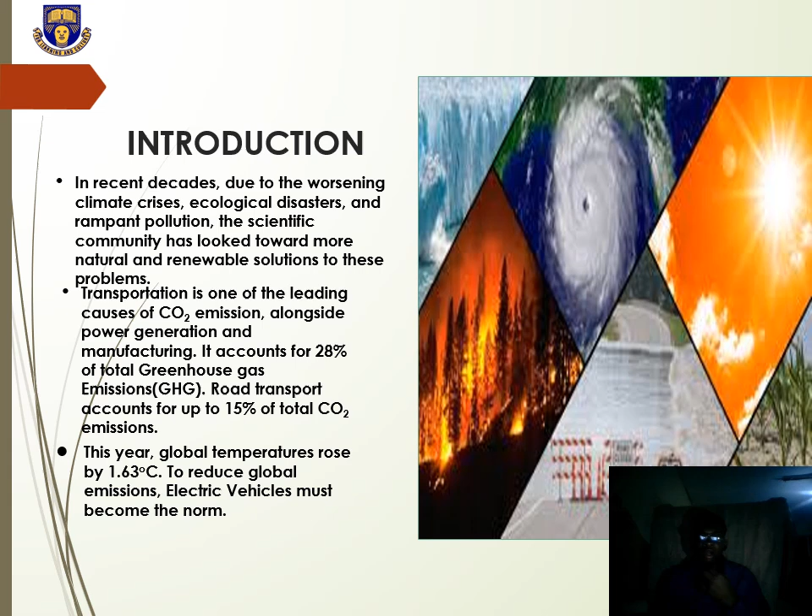Like this year, the global temperature rose by up to 1.63 degrees Celsius, and it has become evident to everybody that using electric vehicles is the way to break out of this terrible situation that we find ourselves in.

But for electric vehicles to become more commonplace, some issues have to be resolved, such as the weight of the battery pack, motor, suspension system, and the chassis. The vehicle weight is very important as it helps determine the performance of the electric vehicle.

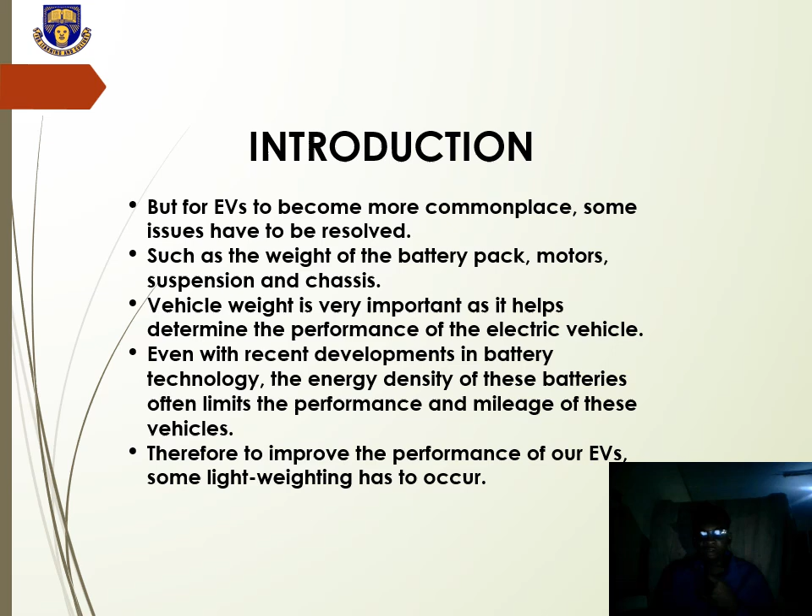But even with recent developments in battery technology, the energy density of these batteries often limits the performance and mileage of these vehicles. Therefore, to improve the performance of our EVs, some lightweighting has to occur. That means we have to further reduce the weight of our electric vehicles to put more performance into it.

So the problem statement and the objectives of the work that was done. The problem statement: a chassis needs to be able to withstand longitudinal twist, shock, vibration and other stresses caused by weight, acceleration, braking, road condition, and shock acting on the vehicle. Then the chassis also needs to be lightweight enough to improve the performance of the vehicle.

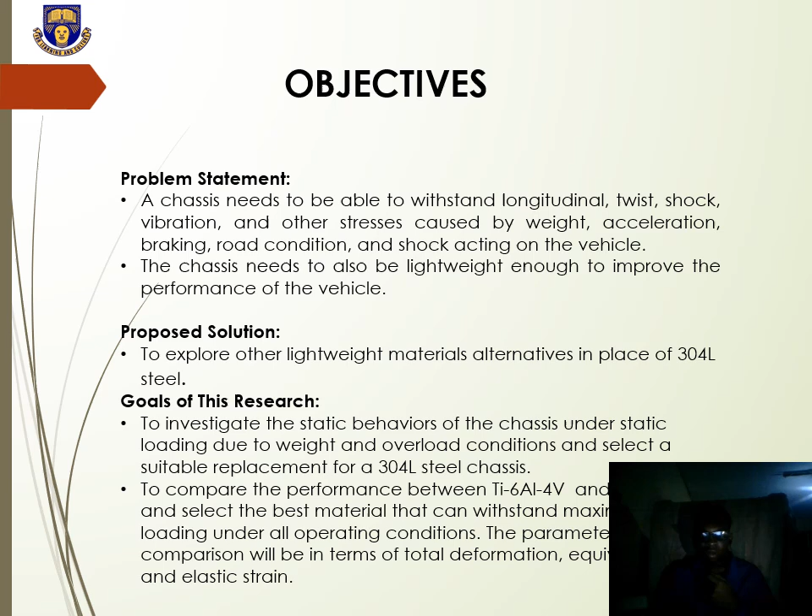Let's move on to the materials and methods that were used for this research. The dimensions of the chassis were analyzed, and we used an open source model for it. Then the dimensions of the structural members were taken to be 70 by 60 by 2. The entire weight of the vehicle minus the frame was calculated. We are going to use that for static loading simulations.

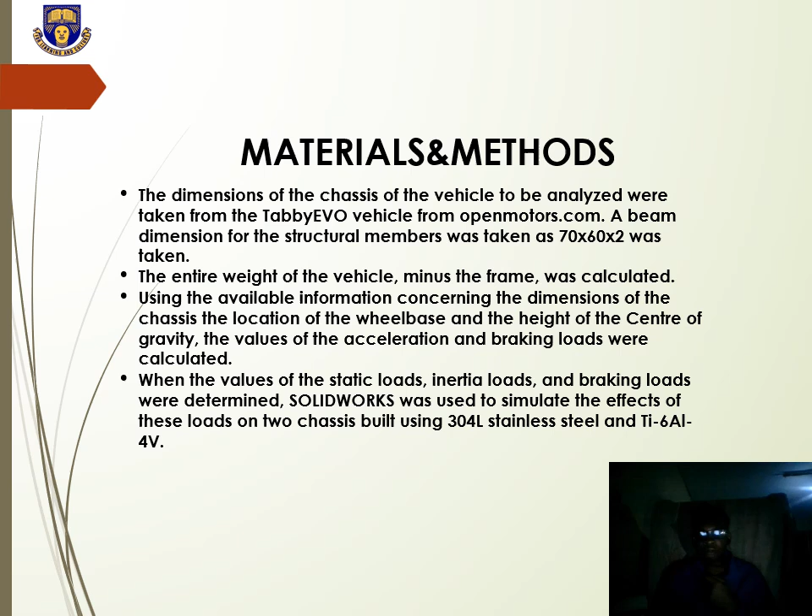Then using the available information concerning the dimensions of the chassis, the location of the wheelbase, and the height of the center of gravity, the values of acceleration and braking loads were calculated. Then when the values of the static loads, inertial loads and braking loads were calculated, SolidWorks was used to model and simulate the effects of these loads on two models built using 304L stainless steel and titanium 6 aluminum 4 vanadium alloy.

Then this was the chassis specification that we used for the open source model. The wheelbase dimension is 2350 millimeters. The track width was 1488 millimeters. The height was 1200 millimeters.

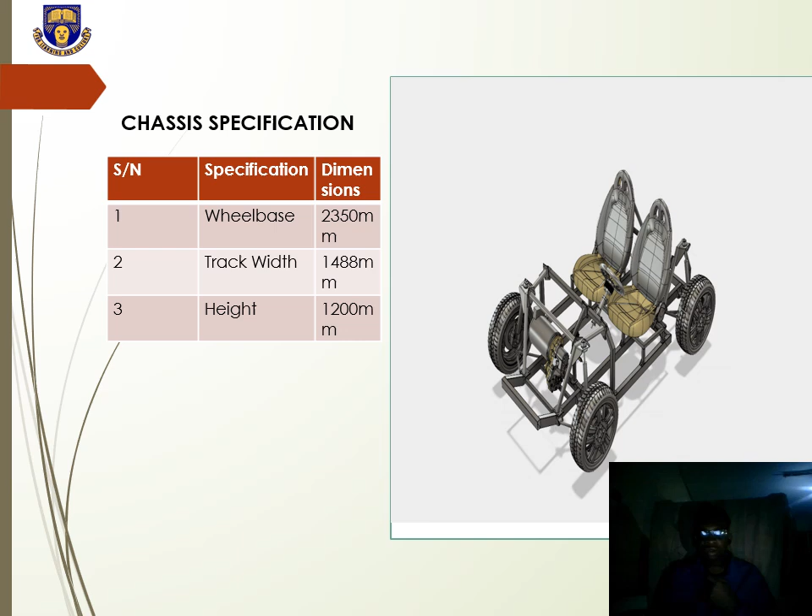Then the material properties of the two materials are in consideration. We took material properties of density, Young modulus, and the yield strength. So the density of 304L steel was 7.9 gram per cm cube. That of the titanium alloy was 4.43 gram per cm cube.

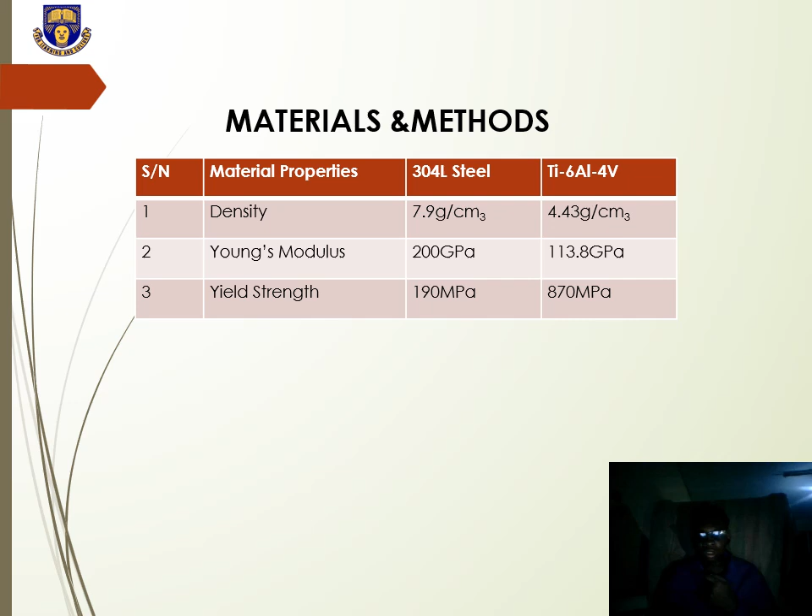The Young modulus was 200 gigapascals for steel, and the Young modulus for the titanium alloy was 113.8 gigapascals. The yield strength for steel was 190 megapascals, and the yield strength of the titanium alloy was 870 megapascals.

Then these are some of the summaries of the findings that were taken from the simulation, static loading and all that. So on the slide we have the deformation of the 304L steel chassis. So from the static analysis of the chassis during normal loading due to the weight of the battery and components. So that's simply due to the weight of the battery and components without any passenger on board.

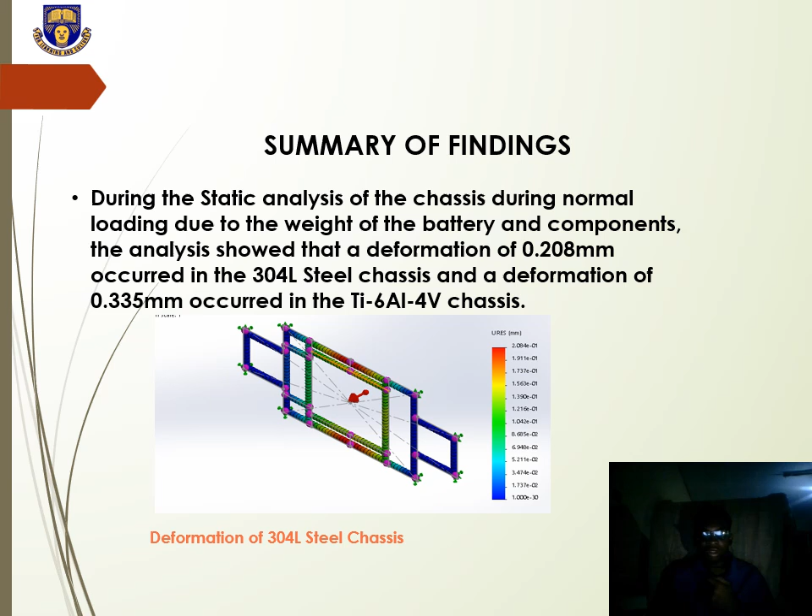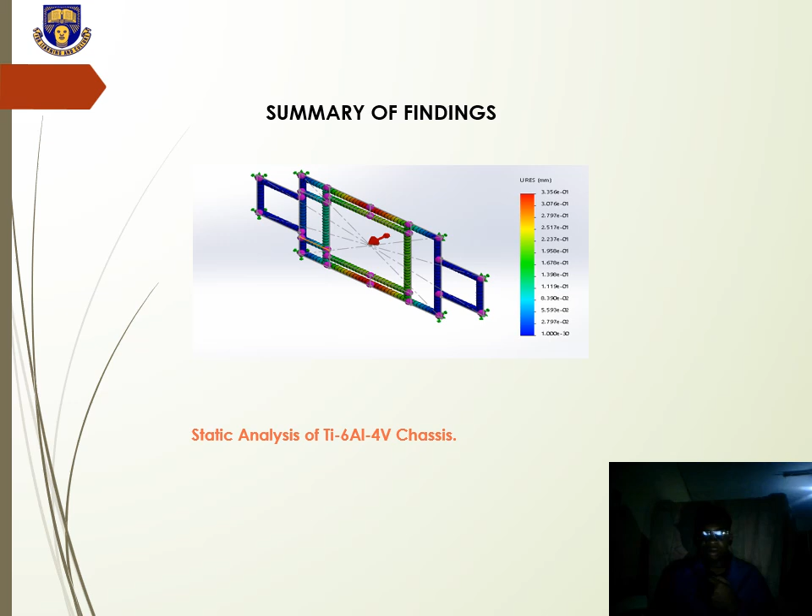And applying that weight on the chassis in the simulation, it was discovered that the total deformation was 0.318 millimeters in the 304L steel chassis, and the total deformation was 0.534 millimeters in the titanium alloy chassis.

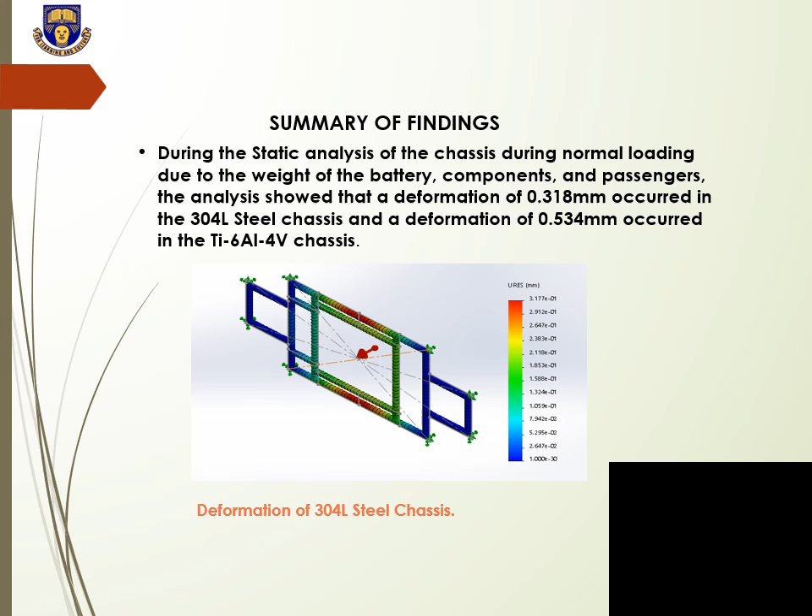Then we also did another simulation for overload. Overload refers to the towing capacity of the vehicle, and we normally add 20% of the total weight of the vehicle and the passengers to the weight that will be used on the chassis to calculate for overload. So overload determines the towing capacity of the vehicle.

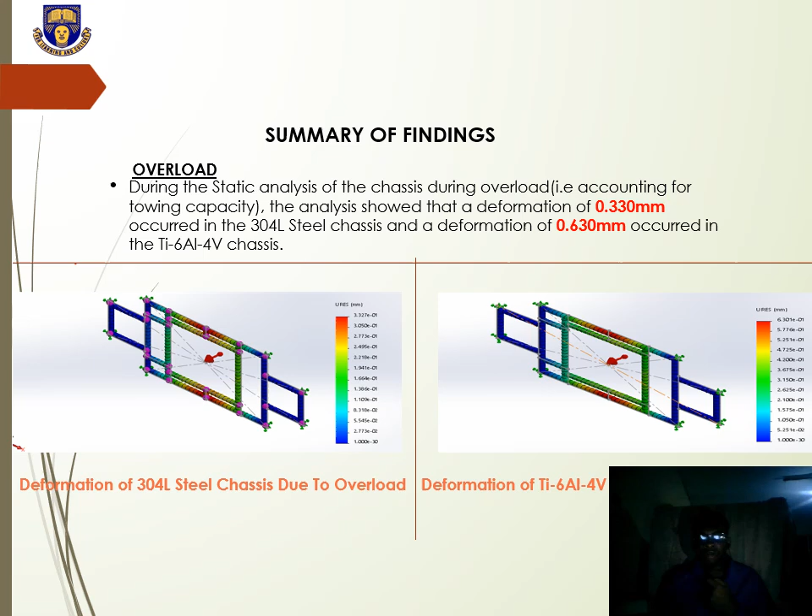So under overload, it was discovered that the deformation in the 304L steel chassis was 0.330 millimeters, and the deformation in the titanium alloy chassis was 0.630 millimeters.

So yeah, the conclusion to this work was that the result of the analysis showed that the deformation and stresses were found to be under the limit for both materials, and the rate of increase of the von Mises stress and deformation was found to be equal. The result also shows that the total deformation of the titanium alloy is higher compared to the steel, but it makes up for it in terms of weight and fatigue strength.

And from the analysis, you can see that the overload caused a deformation of 0.33 millimeters for the steel chassis, and for the titanium alloy chassis, it caused a deformation of 0.63 millimeters. It was discovered that the total weight of the chassis itself for the 304L was 365.56 kilograms, and that of the titanium alloy was 202.25 kilograms.